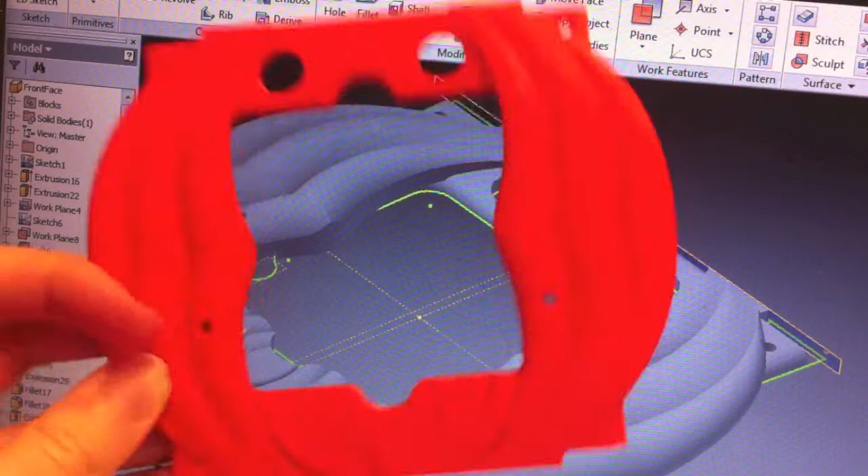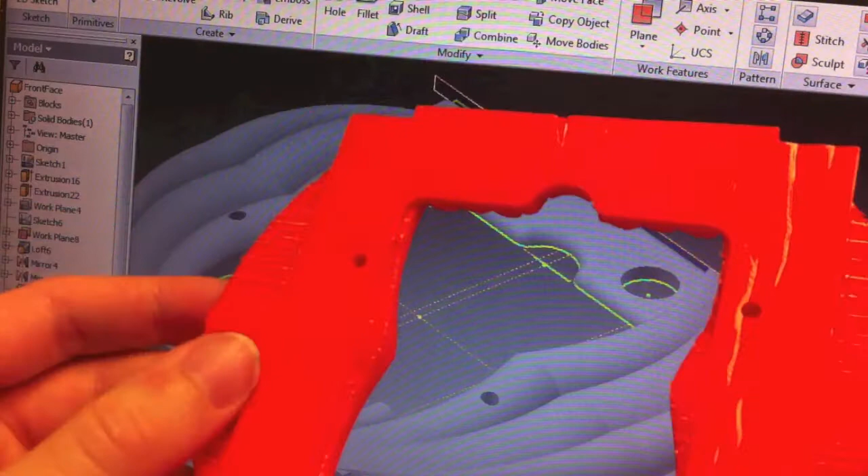Hello everyone! So I recently made this pumpkin face for RoboBrrd, like a front face for RoboBrrd. And while it seems simple, it actually took a long time to make because, I guess, making things that look like pumpkins is a bit tricky. So I thought I'd make this short video to show how I made it, just in case some people wanted to try it out as well.

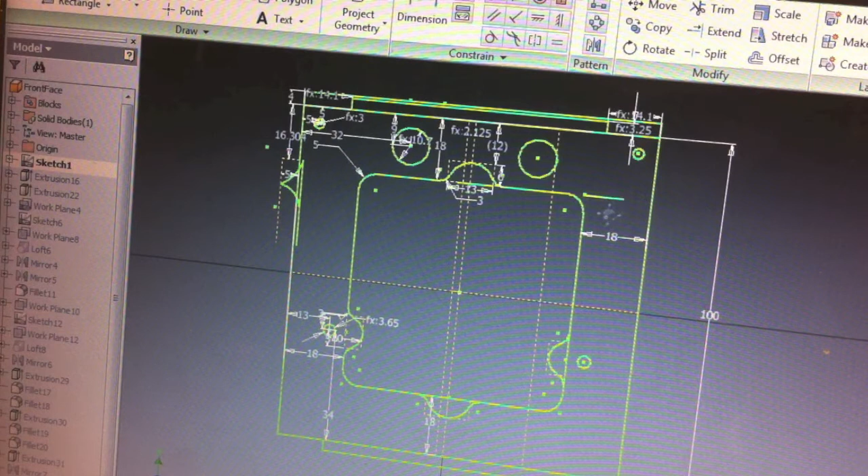So this is in Autodesk Inventor, and as you can see, this here is basically the base sketch, so that's what a front face of RoboBrrd looks like. It's the same one as the laser cut version as well. And then you can see here, this is basically the shape that is making up the pumpkin shape on it.

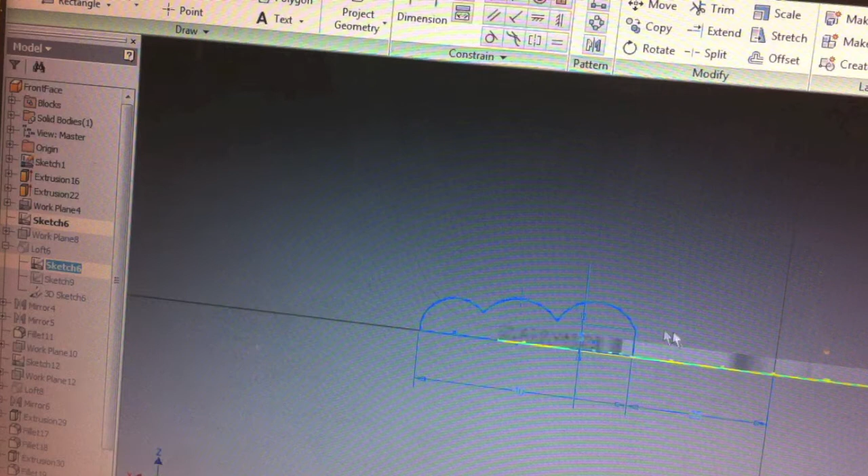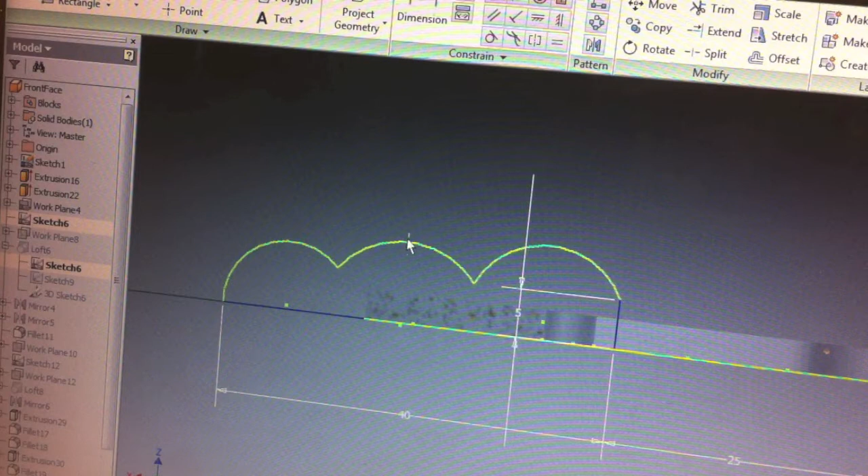So how it starts out is there is this cross-section shape of just little arcs, sort of like half bubbles. It starts at just a bit more inwards than the original sketch of the face, and then an arc, and then an arc, and then extends a bit outwards. And a few of these have dimension constraints on them. And another important part is this point right here. So there's actually a point placed right there. Okay, so anyway, there's that part.

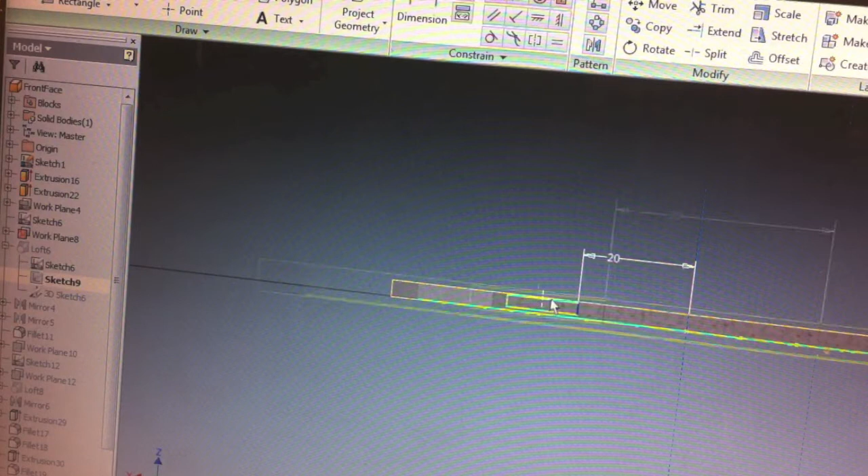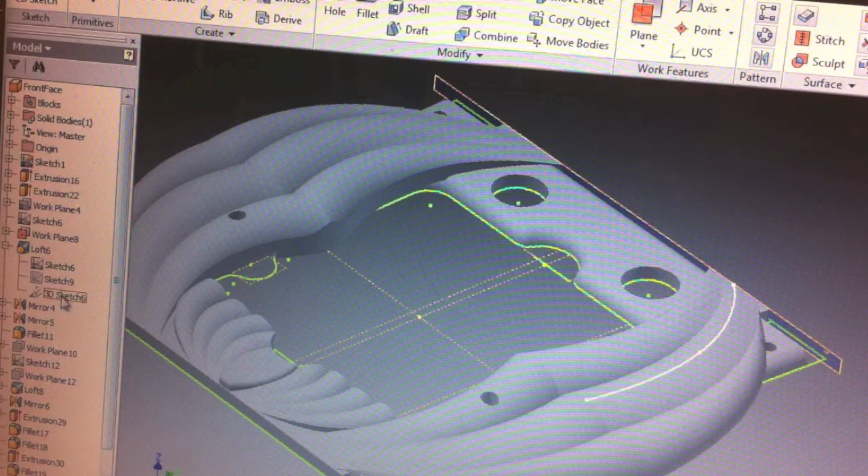And then there is this part up here. So this is another sketch where it's just a rectangle. And it's close to the eye, just above the eye-ish, sort of near it, on the face of the RoboBrrd, and then there's also a point right there on the sketch. And then this part is kind of the annoying part.

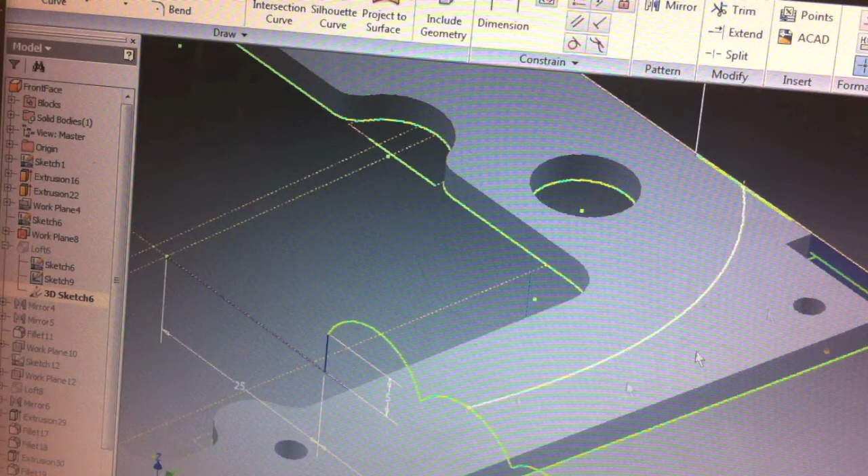There's a 3D sketch with a spline line going from the two points on the previous sketches that I just showed. So I'll turn on the visibility of those sketches. So you can see this spline goes from this point to that point. And you can angle it and see that it's sort of arcing a little bit, trying to get that nice shape. Yeah. Alright, so that's done.

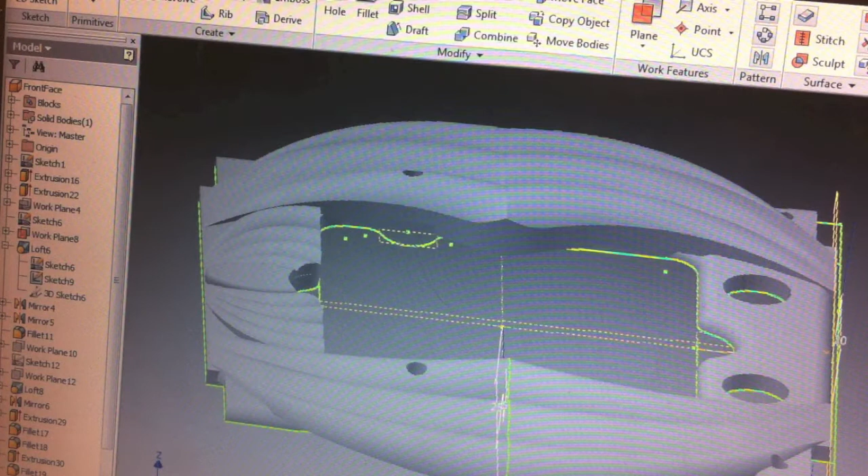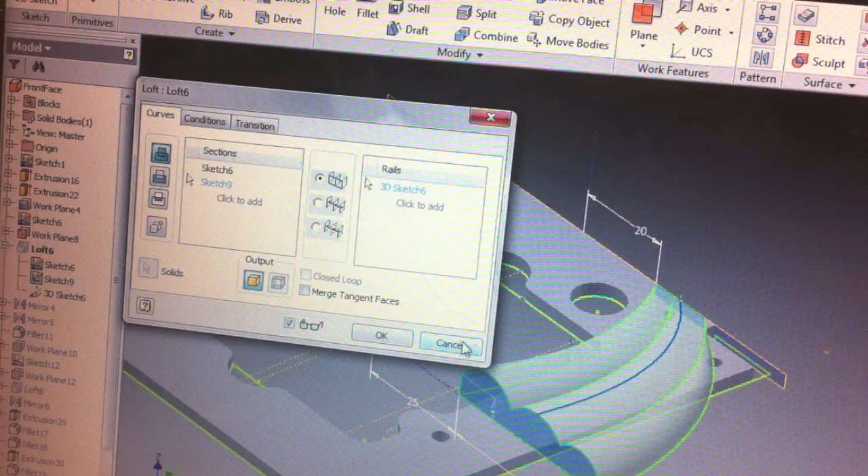And then once all of those sketches were made, it's using a loft tool, or loft command, to bring the two sketches together using that 3D sketch as a rail. And sometimes I found that depending on what the sketch with the arcs on it looked like, it would either work or not work, so it took a lot of trial and error just to get one that would work. And this loft is then mirrored for that quadrant and then that side as well.

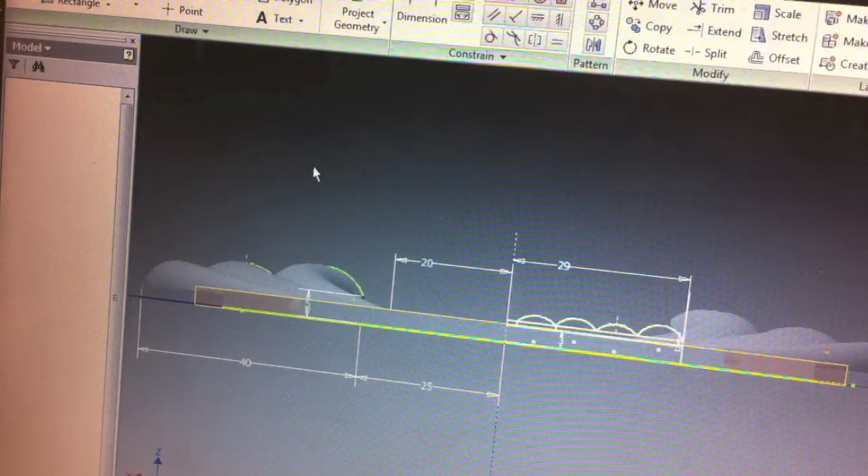Add on some fillets, and then the same thing is done for right here as well. So you can see that there's the sketch, with a little bit of arcs in there. Not too much, because it didn't have to be exaggerated as much. And then of course a loft. So, as you can see.

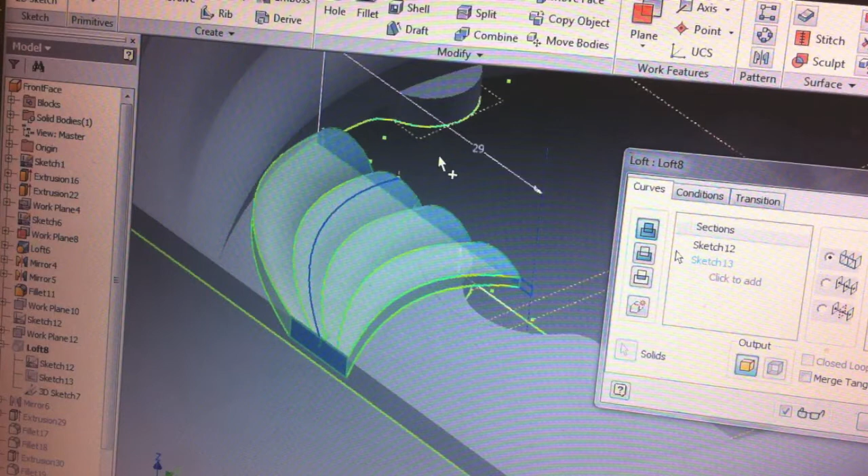So yeah, if you ever want to make sort of curvy shapes, that's basically how you can do it, using two sketches and a 3D sketch joining two points together on the two sketches, and then using a loft for that.